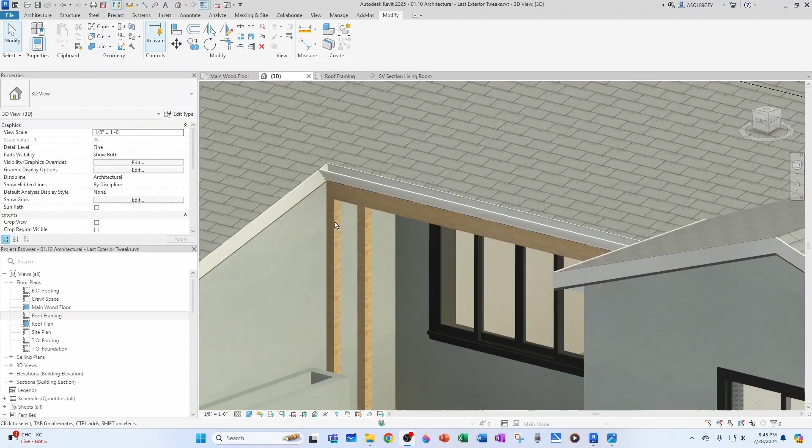And I noticed on the last visit that these posts are actually sitting on top of the planter, and the planter is not hollow. It has been filled with concrete. So I have to shift those posts south a little bit, and then I'm going to offset a little bit of overhang over the beam, probably about a foot. So for that, I'm going to go to my 3D view, and I'm going to select my 4 posts and my beam, and then I'm going to go to the main wood floor, and I'm simply going to eyeball it.

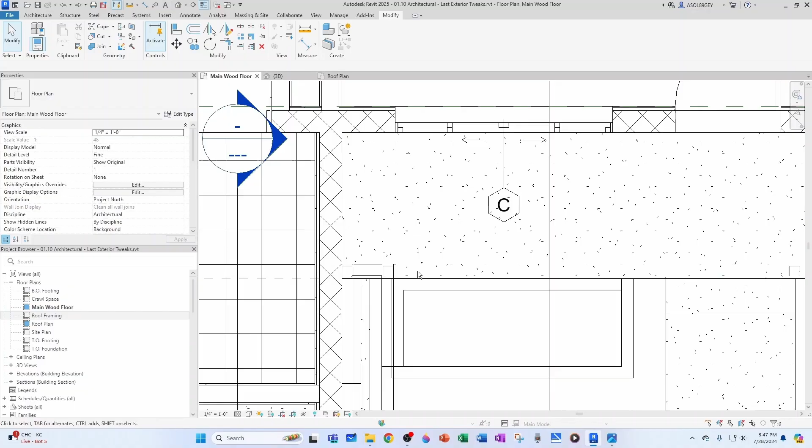It's somewhere around here. And now I'm going to go to my roof plan, and I could underlay the main wood floor so I see this, but really what I care about is just this distance here. So I'm going to take a drafting line, cut it, and paste it here. Now what I want is this roof offsetting a little more, so I'm going to edit this footprint, and this is pretty tricky because I need to keep at least part of this line so that it slopes such that the main ridge meets the south bedroom ridge. If I just drag this line down, then this will slope differently, and those ridges won't meet.

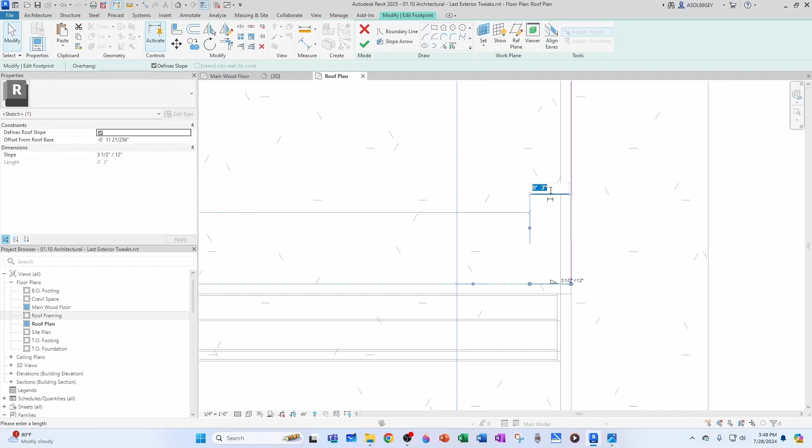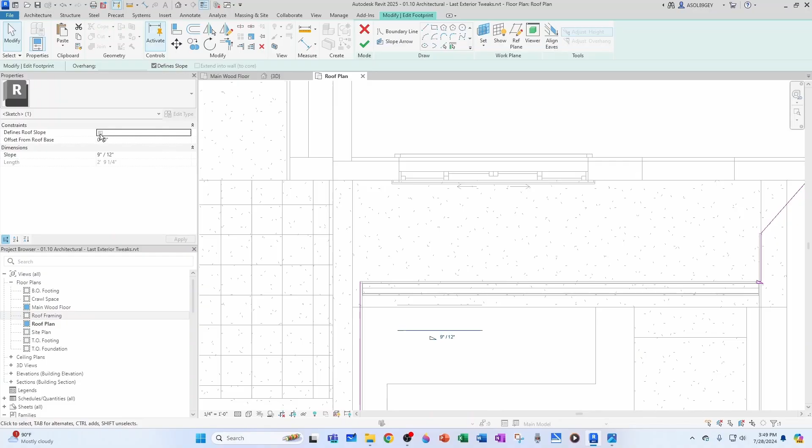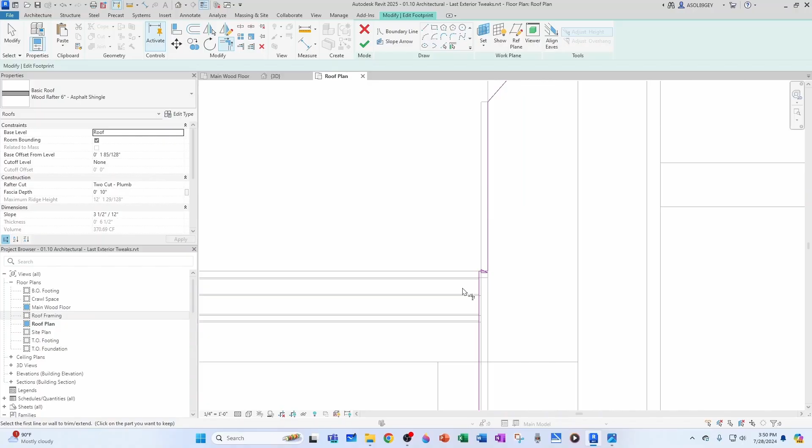What I'm gonna do is simply grab this line and take it to about maybe 3 inches, and then this line is the one that's gonna define my slope to meet those 2 ridges at this point. Then I'm gonna pick lines and give those 10 inches of overhang based on that line that I just brought in. Now I want to make sure that this line doesn't define slope, and I want to trim this guy with this guy, and then I can create another line from the edge of this one, make sure that it doesn't define slope, and then trim from here to here, and let's see if this works.

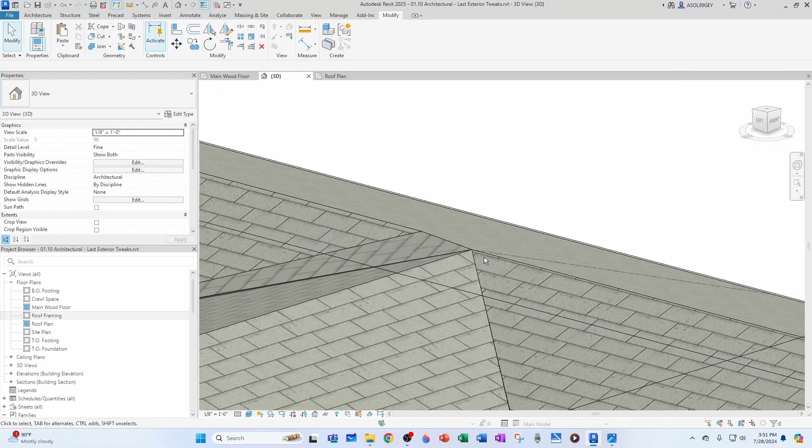Oh, and now it's getting rid of my gutter. That's fine, I'll just delete it. The roof is more important. The important thing is that those 2 ridges still meet here. So when I go to my 3D view, I have my roof extended, but I still have my 2 ridges meet at the point that I want. So very good, we can continue. I'm just gonna create similar. I added my fascia there, and now I want to add my gutter, so I can come back here and say create similar. Just put it here.

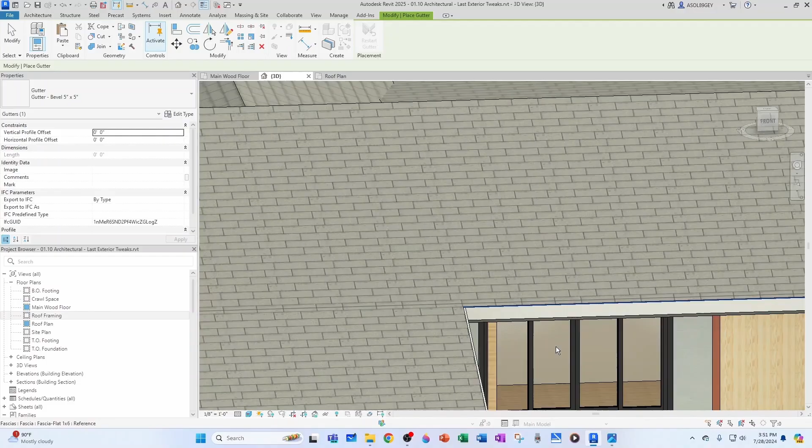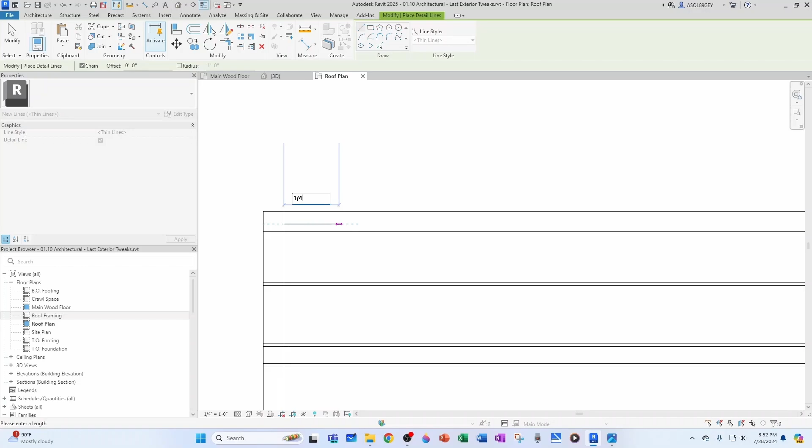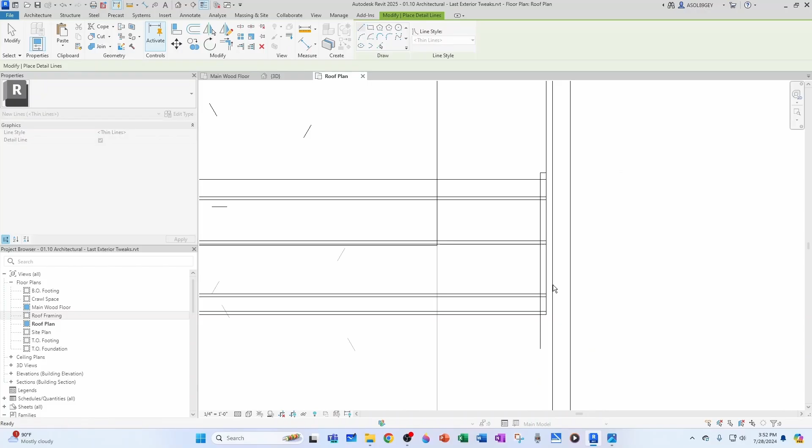I'm going to make sure we lower it 1/2 inch, so minus 1/2 inch. Then I want to go back to that roof plan. I'm going to do that drafting line at about 1/4 inch. And then I know that this gutter is gonna end here. I'll delete that line. And then you want to have another drafting line, a 1/4 inch. And we know that this gutter is gonna end here.

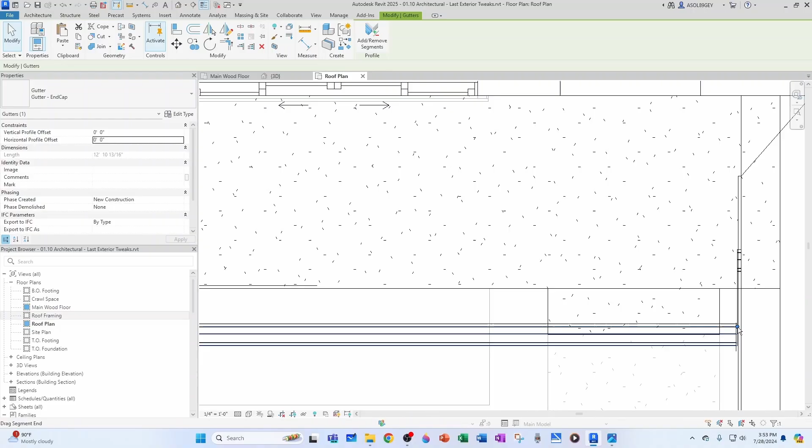And we want to bring in our caps. So create similar, come back here, place here. We want to shrink to here. And we want to shrink to here. Again, create similar. We want to attach to our fascia, which is this one here. And we want to make sure we shorten this up to meet the other gutter.

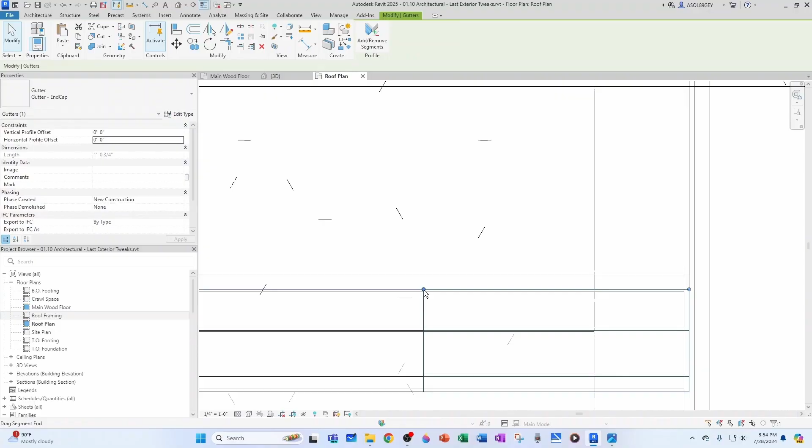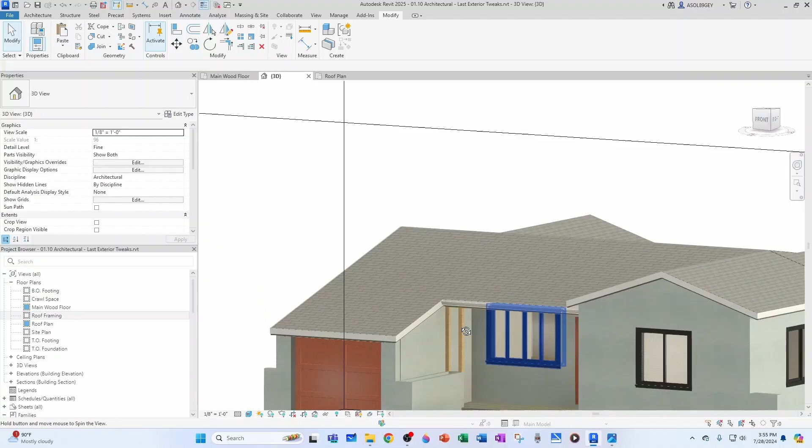Let's take a look at our 3D view. We want to lower our caps 1/2 inch. So there's one here, control, minus 1/2 inch. And beautiful. And now we are finally ready to bring our gutter downspout down here and turn it this way.